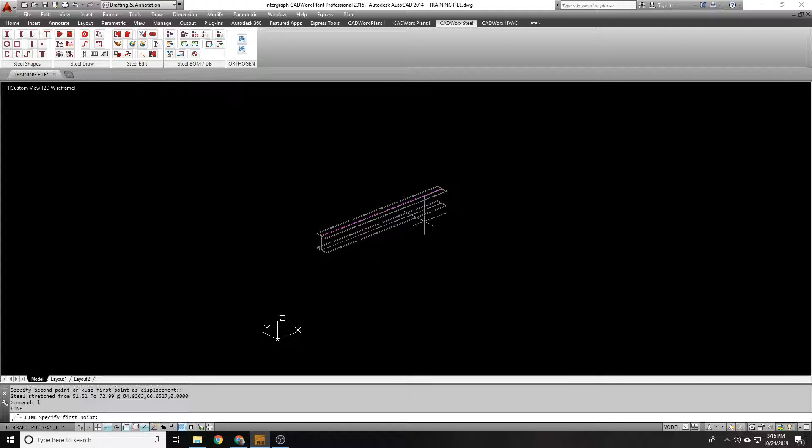Now we're going to look at the opposite of steel cutting, which is steel unioning. A steel union just brings two separate steel shapes back together. There are a couple limitations, should be pretty self-explanatory, but when you cut a member and you want to bring that member back, or they don't even have to be members that were cut, they can be two separate members that were drawn.

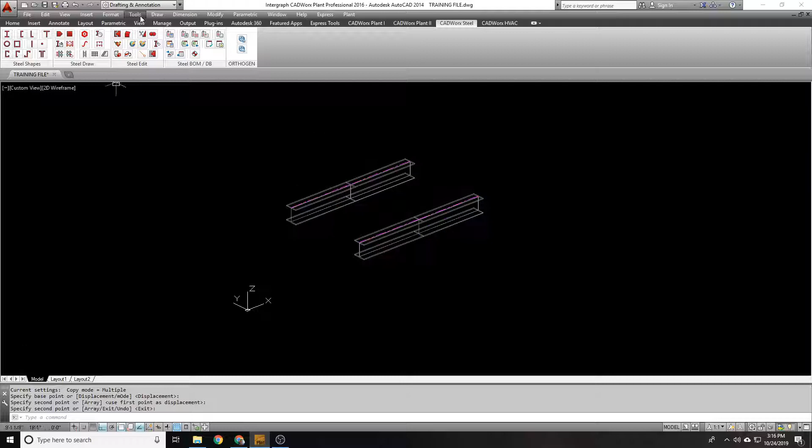Here, I'll do another one where this is just copied from here to here. So we have one that's been cut and one that's been copied. All a union does is you select the objects you want to combine, and it just combines those objects back together if they are like objects.

If they are not like objects, you can see that it says members selected were unable to be combined. They need to be the same objects, and probably the same in every manner. We can try a different insertion point. Not going to happen. We can try a different center point or center line location. Still not happening. In order for these to match up, everything about them needs to be identical.

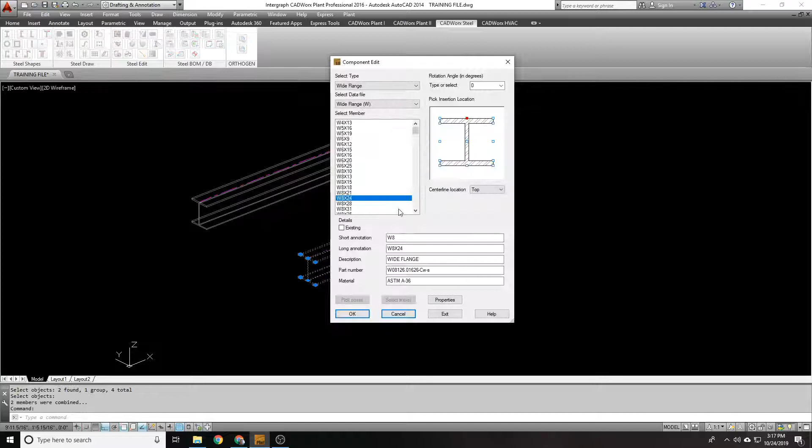So keep that in mind when unioning. There's not too much else to say about unioning. As long as the members are the exact same size, and in the case of channels and angles, the same orientation, everything needs to match up, you can bring those members back together. Again, this is great for—you probably won't have to use this very often, especially considering the ease in which you can just make new beams or stretch one out or something along those lines.

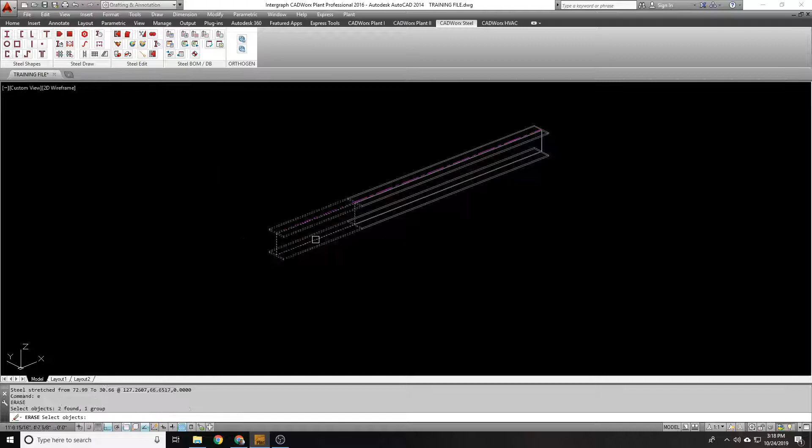But there may be times where you have two separate beams. Say, for example, let's try this. Let's say I've got the interior beams of some structure, okay? And then I'm going to rotate this one, and move this down a bit. We're just looking at intermediate beams here, and these cross each other.

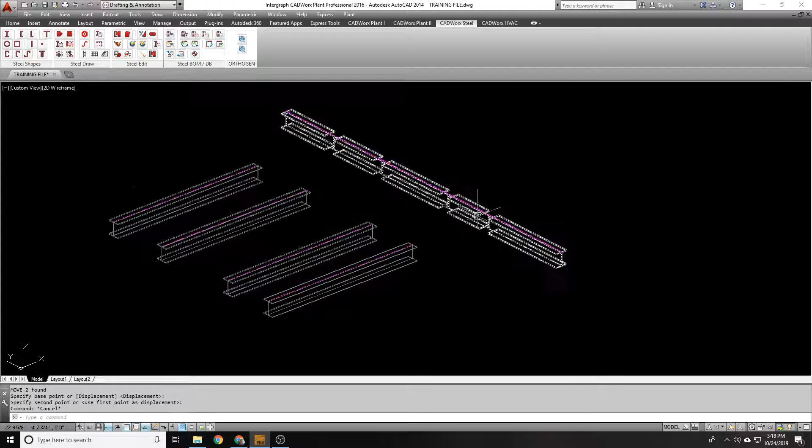Let's say I do a cope like from earlier, and let's do a welded cope. Oh, I didn't do all of them. All right, let's say I want to bring these back together. You're probably going to have to remove the cope. Let's see if we can union without the cope. We can union without the cope, but you'll see that it's kind of reset.

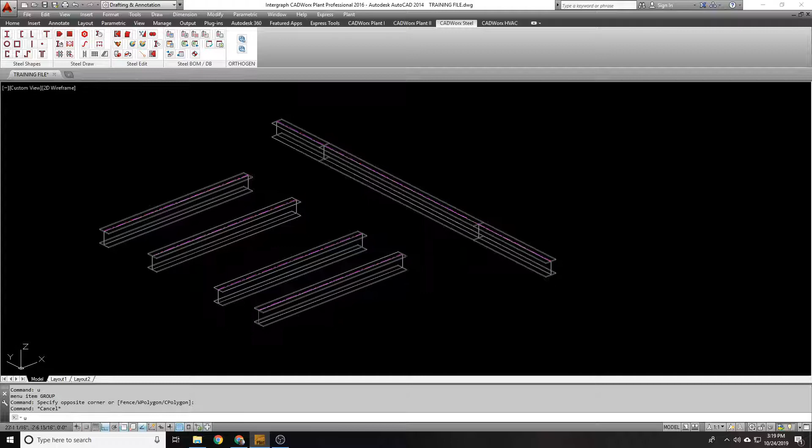Not reset—it's got the cope still in there. What you can do is double click and bring them back together. It may do it like it kept the coping planes on this one, so you can just reunion. It's possible the coping planes may still be kept at times, but it looks like in this case they got rid of it. So you may have to do that union a couple times, but that's an example of an area where you may want to take this and make it a through member, so you want to combine it.

You can also get rid of the copes. If you turn auto cope off—let's say we have our copes here, right? They're all coped out. We can turn our auto cope off and just say okay a bunch of times. It'll get rid of those copes, and then you can just steel union back together.